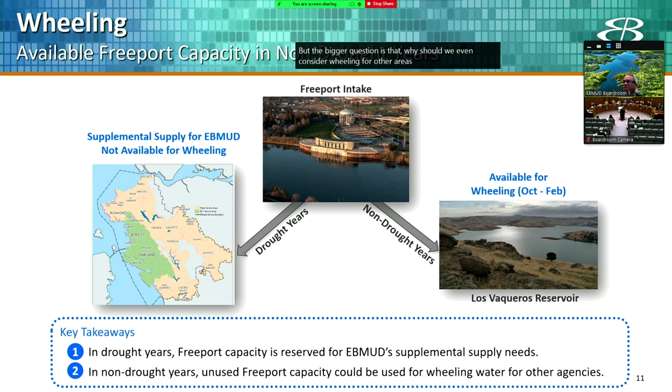But the bigger question is, why should we even consider wheeling for other agencies? That's because by law we are kind of obligated. Water Code Section 1810 through 1814 requires an agency to wheel transfer water for other bona fide users if conveyance capacity is available, provided that certain conditions are met.

These conditions are: the wheeling agency receives fair compensation, and the wheeling operation does not injure any legal users of the water or adversely impact fish, wildlife, in-stream benefits, or the economy. If these conditions are met, we are obligated to wheel.

Plus, wheeling supports regional partnerships and may improve regional reliability and resiliency. And also, if fair compensation is received, wheeling can recover some of the capital costs that have already been spent to construct a facility that is not being fully utilized.

For example, when we looked at the LVE partners using Freeport during non-drought years between the months of October and February, we found out that we could collect revenue up to $140 million by letting other partners use Freeport.

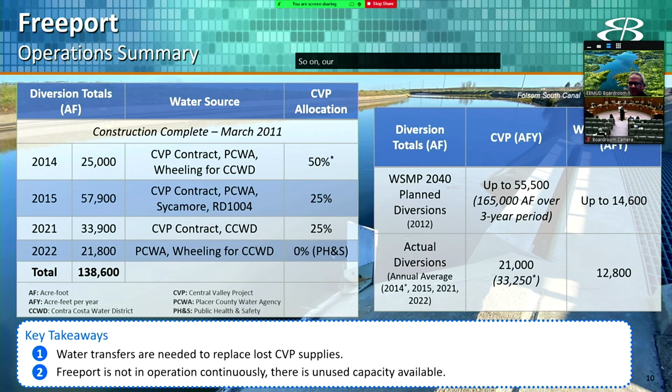Thank you. I have some comments I'll add. So on our wheeling principles, I think we will need to not just take a simplistic look at the water use efficiency criteria that we enumerated in the Marin example. I think we got to the bare minimum, and I was minimally satisfied in an emergency situation. But if this were going to be under regular consideration, I would want to look at those more closely and improve them so that our infrastructure is not being abused to support an unsustainable water future. I think we need to be looking at the water use efficiency in all types of sectors and make sure that our infrastructure is used to support something that is efficient and sustainable. And so having those criteria reviewed and improved for this quite different application, I think would be pretty important.

And then second, I think the board would need to better understand the assumptions for the EIR. You know how we were assuming not more frequent. Well, we should find out what kind of draw was studied in the EIR, and consider if there are changed conditions along the Sacramento River and affecting the delta, and just to understand, before we do anything major, what are the impacts on the river and the fish and other ecological criteria, so that we are aware of what was studied, aware of what changed conditions could indicate, and that we not take the environment for granted, based on our EIR that may be nearing 20 years old.

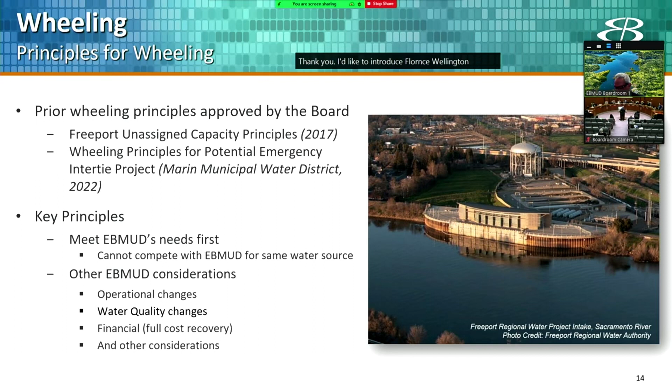We can move on to recycled water. I'd like to introduce Florence Wellington for covering our recycled water. Thank you, Hassan.

I just want to give a quick overview of our current recycled water project. We currently have 5 non-potable projects, and combined those 5 projects have a production capacity of 9 million gallons per day.

Our goal is to produce 20 million gallons per day by 2040. We do have future projects lined up that could provide an additional 11 million gallons per day. So far, to get the 9 million gallons per day, we have invested $145 million plus state, federal, and private funding.

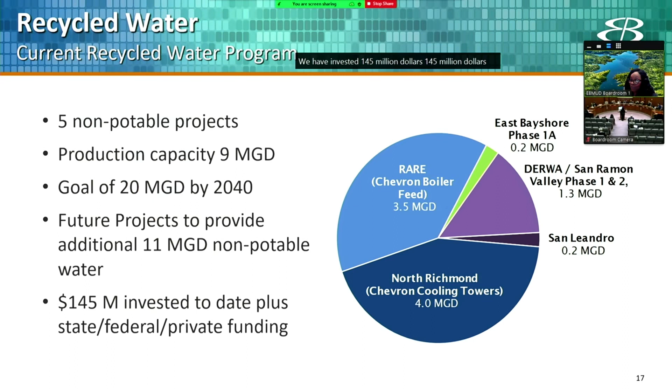In 2019, we updated our recycled water master plan. The plan recommended that we expand 3 of our existing projects, the ones at the top of the figure: East Bayshore, San Ramon Valley, and our 2 projects for Chevron, North Richmond, and RARE.

The plan also recommended that we support new projects like Phillips 66 and satellite projects. The plan also looked into the possibility of potable reuse projects, and that will be reevaluated in our upcoming 2024 strategic plan.

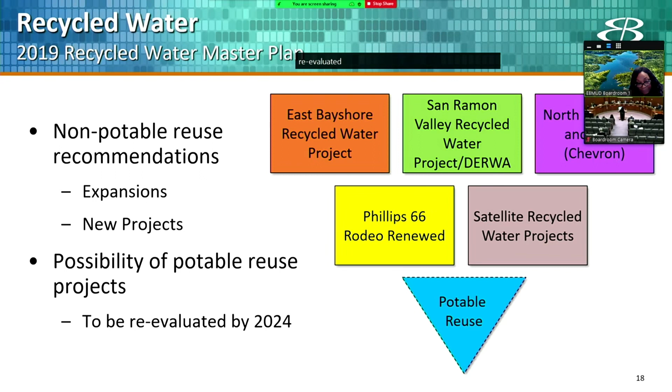Since our last update, there have been some changes in regulations and legislation. In August of 2022, the governor presented the California Water Supply Strategy, which included several statewide goals, including recycling 715 million gallons per day by 2030 and 1,600 million gallons per day by 2040.

The Water Board is also scheduled to approve regulations on potable reuse by December of this year. They have been reviewed and commented on by expert panels and water recycling advocacy groups, and we have been tracking those regulations all along.

The governor also approved legislation that lowers the indoor water use standards. Lowering these water use standards, although really good for potable water conservation, provides less recycled water supply and has impacts on the recycled water quality.

The state also updated the Cross Connection Prevention Handbook, which is important because it codified backflow protections to the potable water system. There have also been new regulations regarding PFAS and CECs, which is important because these regulations could affect treatment for recycled water, especially when we're looking into potable reuse options.

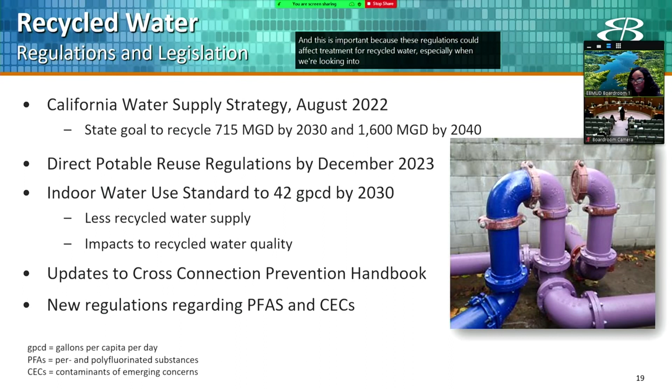Source and water quality are some things we've been looking into as well. Reductions in wastewater flow due to conservation and drought have a negative impact on recycled water.

When wastewater flow is reduced due to conservation or drought, it promotes increased Bay water intrusion, leading to higher TDS concentrations. The lack of dilution also causes higher ammonia concentrations in the wastewater. So with TDS and ammonia concentrations being worsened during droughts, that's exactly when recycled water is needed the most.

Recycled water with high TDS and ammonia can't be used for industrial applications such as cooling towers, and it also has a negative impact on landscape irrigation. The photo to the right shows what a healthy plant looks like, and the impacts of recycled water during droughts on those same types of plants.

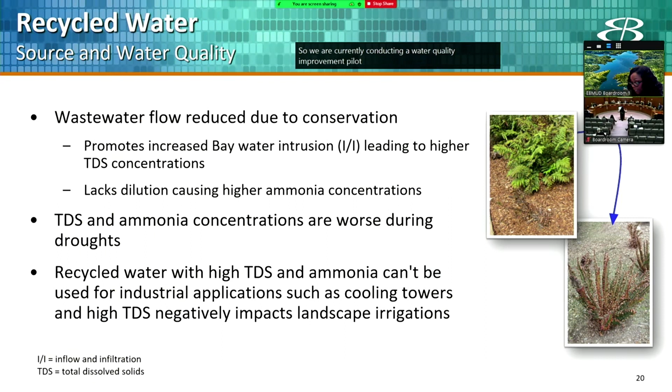We are currently conducting a water quality improvement pilot study, which will be completed in March of this year. The study is going to recommend the best options for improving water quality.

Once we implement the recommendations from the plan, we'll be able to increase our customer base and the types of users we have. We'll be able to potentially increase our supply at RARE, and we'll be able to provide washdown water for Caltrans maintenance fleets.

The president recently signed an omnibus bill that earmarked $4.2 million to extend the distribution pipeline for East Bayshore from Emeryville to Albany. Once installed, this pipeline will increase recycled water usage for this project by 370,000 gallons per day.

The $4.2 million we got was part of a WRDA authorization the district received for $25 million, so the $4.2 million will be taken from that, but we are seeking additional funding. We're currently working with the Corps to see if we can get another authorization that will allow us to expand our pipe distribution into Alameda.

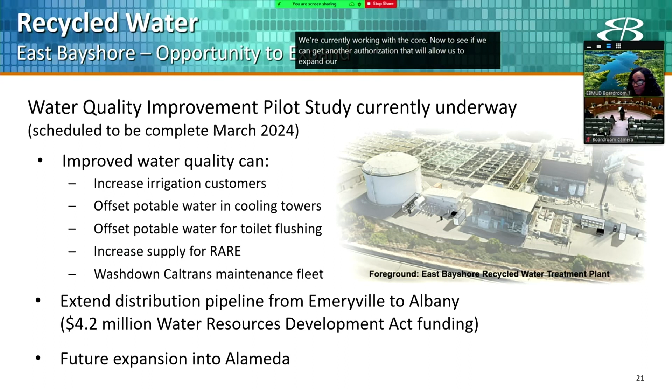Our DERWA project is our joint partnership with DSRSD that serves the San Ramon Valley area. This has been a very successful project for us, although it is supply short during peak months, and the agencies have been working to look into supplemental supply and operational strategies that can maximize our deliveries.

One thing we did two years ago was DERWA entered into an agreement with Central San to divert some of their wastewater to DSRSD for treatment. We operated that project for the first time in 2021. We didn't have to operate it in 2022, so we're coming up on the third year of the agreement, where we'll see whether or not we need to operate it this year. The agreement is for 3 years, with the option to renew for up to 5 years total.

Another thing we did for this project was install flow monitoring devices on our largest recycled water users in the San Ramon area. With those devices, we're able to get real-time data, so we've been able to alert customers when they have leaks or if they're using water off hours. This is a way for us to conserve our limited supply of recycled water.

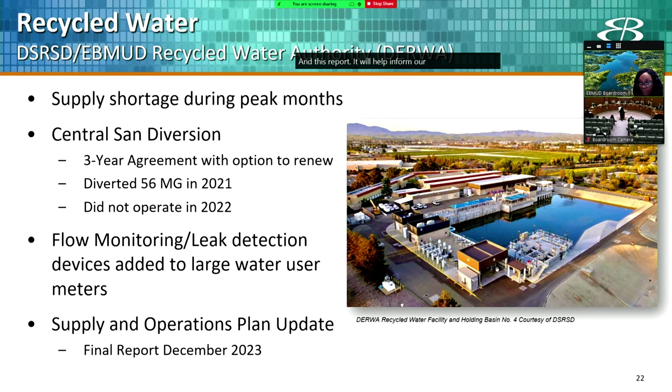Last October, we signed an MOU with Central San to complete a feasibility study evaluating 6 recycled water partnership opportunities. In December, we finalized the work plan to include evaluating both non-potable and potable project alternatives. We're currently procuring a consultant to help with the evaluation.

The scope includes analyzing information from previous studies, defining feasibility criteria, evaluating each of the project concepts, and developing cost estimates. Equity will definitely be a consideration when evaluating each of the project alternatives. We expect to have that report completed by October of this year, and it will also feed into our strategic plan update.

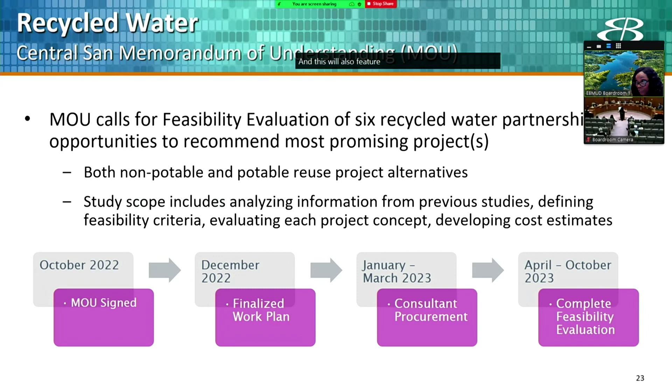This is an overview of the 6 projects we will be evaluating, considering cost, feasibility, and equity. Although these are all great projects, there's not enough recycled water supply for us to implement all of them, so the final report will recommend a short list of projects to be considered in the recycled water strategic plan update.

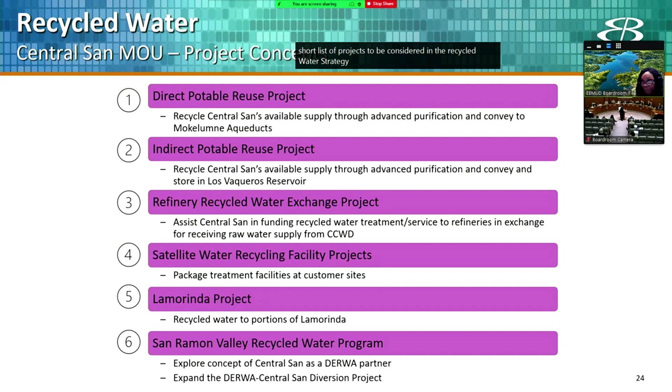Just last week we were able to issue an RFP to start on the strategic plan update. Proposals will be due March 17th, and we hope to bring a consultant contract to the board for consideration in April for that report.

The final report is going to incorporate the Central San feasibility evaluation. It will also incorporate the results of the East Bayshore pilot study project we're working on to improve water quality, and it will incorporate information from the DERWA supply and operations report. It will reevaluate recommended non-potable projects from the 2019 report, reevaluate potable reuse alternatives, and consider new recycled water goals to incorporate potable reuse.

We hope to brief the board on the progress of that report sometime in early 2024 so we can get some feedback from you all.

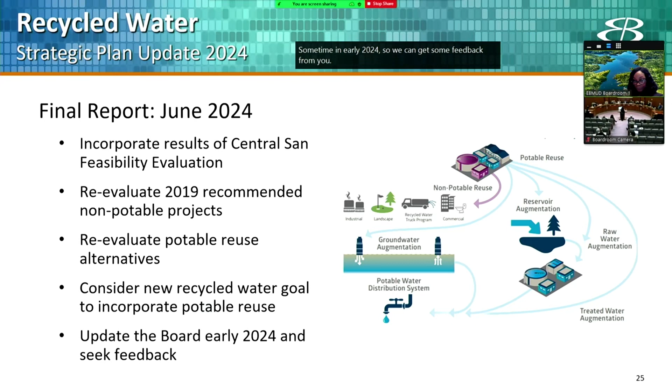We're also going to be looking at some other alternatives, such as expanding from Albany to Richmond, expanding over to UC Berkeley, and also looking at potable reuse.

So we have the ability to possibly increase our goal from the 20 million gallons per day. But one of the things we will be looking at is how we can bring the costs down, so with cost sharing, maybe with other agencies or entities, funding through state or federal sources, and things like that. And then we'll update the board at a future meeting on the strategic plan. So that's all I have for recycled water.

So if you have any questions, I'd be happy to answer them. Director Coleman? Thank you, big proponent of recycled water. My concern, and you mentioned it, is PFAS.

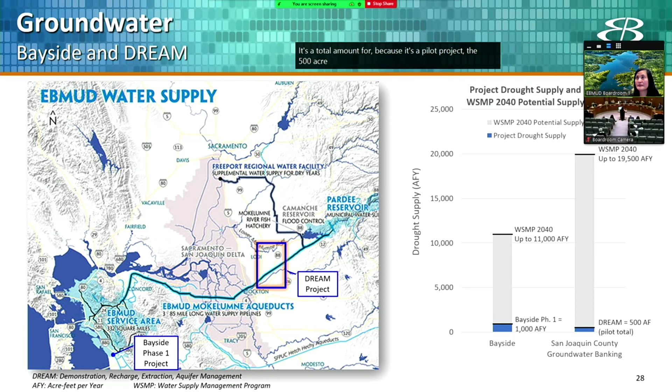I want to highlight the update on Dream first. We have an exciting update to provide. We achieved a milestone just a week ago of completing the startup extraction testing of the new facilities constructed last year to deliver groundwater into our aqueducts. Over about 2 weeks, we injected about 40 acre feet of groundwater into Mokelumne Aqueduct 1, which was blended with surface water. That's a big milestone, since we've been trying to bring groundwater from San Joaquin County over to the East Bay for about 30 years.

We still need to finish the pilot, evaluate the results and lessons learned. We have released about one-third of the Mokelumne River water being provided to North San Joaquin for this project—about 342 acre feet to be exact. We still have to release two-thirds of that, since 1,000 acre feet is the total for this project. When surplus water is available, we'll be able to make those releases. I'll talk more about that in the next slide.

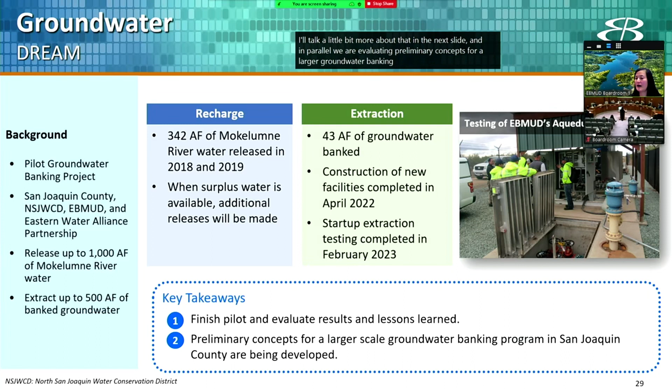In parallel, we are evaluating preliminary concepts for a larger groundwater banking program in San Joaquin County. We are in discussions with the partners on that.

As far as the surplus water, whether it's available this year, we still have to wait a little longer. We are currently evaluating whether we have surplus water available relative to state regulations. At the second board meeting in April, you'll be presented with the water supply availability deficiency report and provided the water supply conditions assessment for the water year.

Typically at that meeting, like back in 2019, there was a preliminary determination of whether surplus water was available, but staff makes a final determination after that report comes out as to whether or not it's available as surplus to our needs and obligations. If it's confirmed that we have surplus water available, we can proceed with scheduling storage of the surplus water, and the timing of that depends on project specific requirements and conditions. For instance, with Dream, we have to work with our partners to ensure the timing coincides with when they need it for irrigation.

So that's the update. The question is whether we'll know this year in time to take advantage of the surplus water at all. I think there will be a determination in time, but it will still occur after the April water supply deficiency report.

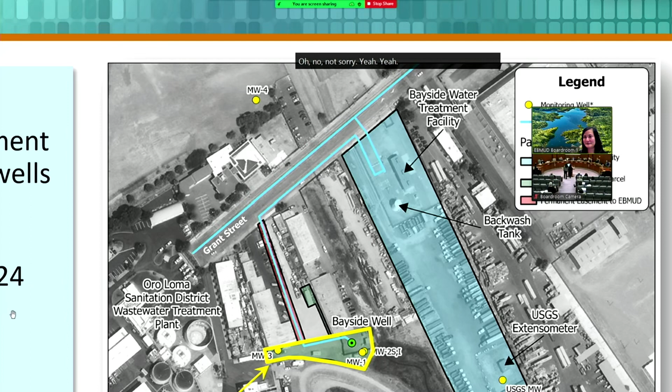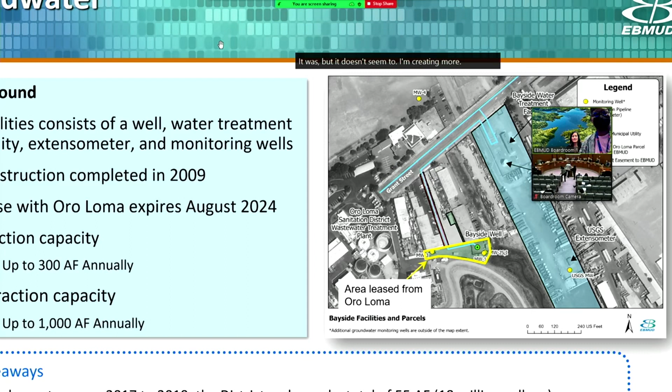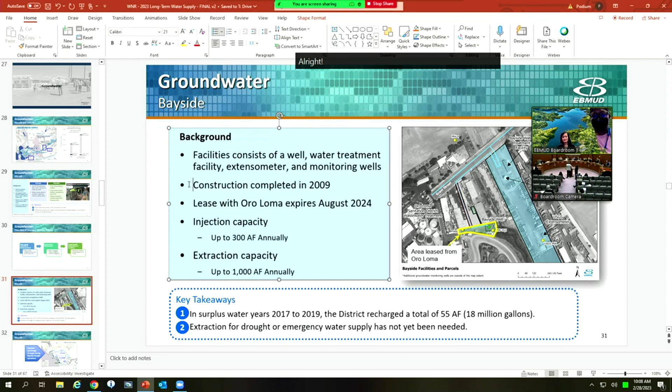Janetta, is there a way to move where the spotlight is on the Zoom so we can see the key? I can't read the key on my paper. Yes, thank you—up, over, put it over our logo. Oh, no, not that. Sorry, undo the Zoom. It's not the display, it's what's behind it, the picture. Move it up over our logo if you can. Not, no, don't. It was, but it doesn't seem to. Sorry, I'm creating more confusion. Sorry, Robert. Can't you go to slideshow? Control L.

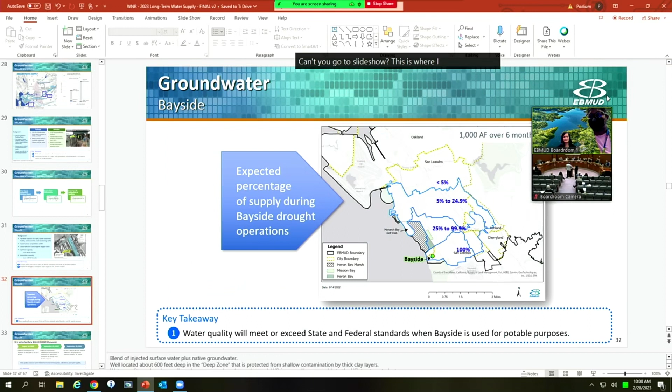Yeah, I think I was just finishing. Is that better? Thank you.

Just the last point on this slide - we have not needed to extract using Bayside for droughts or emergencies yet.

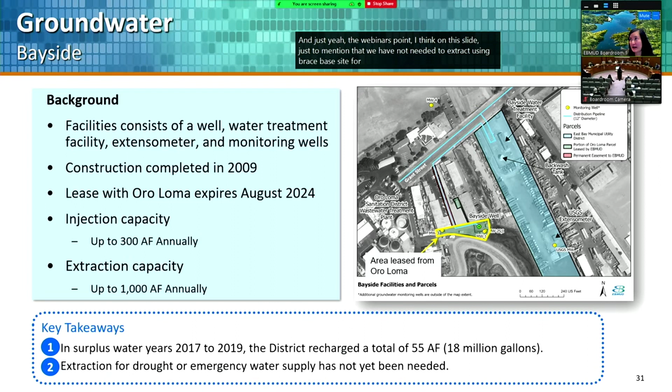Ahead of our discussions with Oro Loma, we conducted updated hydraulic modeling to look at the area over which the Bayside water is distributed and the percentage of the supply when it's in operation. This figure shows that the area over which Bayside water gets distributed extends roughly from 2 to 4 miles away from the well, and the percentage of supply received within that area ranges between 5 to 100%.

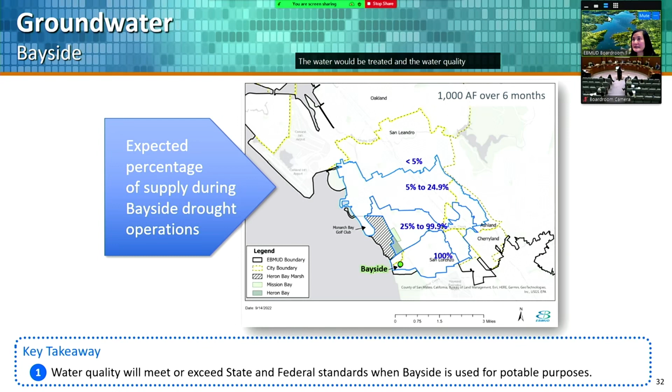Just a reminder that the Bayside well is located in the deep aquifer zone, about 600 feet deep. It's protected by thick clay layers from shallow groundwater impacts. If Bayside were to be used for potable purposes, the water would be treated and the water quality would meet or exceed all state and federal standards.

This is the summary of the discussions we had with Oro Loma last year. In August, we presented the board an update on Bayside, and as a result of that discussion, the board requested a workshop to be held because they had more questions on the project that they wanted discussed in more detail.

We went back in mid-September to present on the questions we received from the board via email, and following that, a week later, the board met to consider the lease extension, but they did not vote to extend the lease beyond the August 2024 date.

The public was present during these meetings. Some of the key concerns that were raised were related to environmental justice, subsidence, and water quality.

So next steps: East Bay Mud will plan for a replacement Bayside well to be constructed on nearby East Bay Mud property, where our existing water treatment facility for Bayside is located. We will also need to address concerns raised by Oro Loma and the local community groups through community engagement.

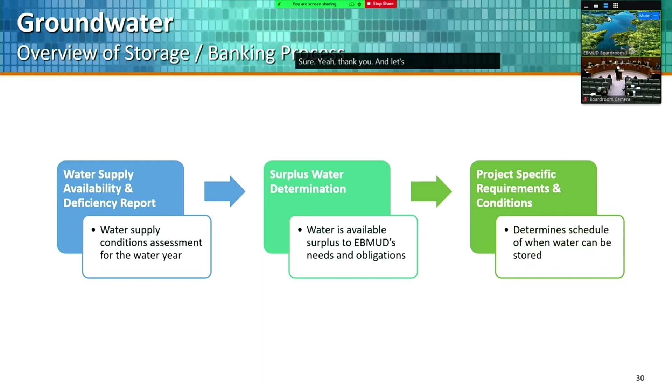If there's no further questions about groundwater, let's go on to Los Vaqueros. I'll also be providing the update on this project. Just a quick reminder: it's to expand the existing Contra Costa Water District's reservoir by 115,000 acre feet. East Bay MUD is evaluating whether to secure 30,000 acre feet of storage, and is one of the 8 voting members of the JPA that was formed in 2021. The project capital costs are currently estimated at $980 million, with a California Water Commission grant of $477 million. The current estimated cost for East Bay MUD's capital cost is between $65 to $130 million.

And just a reminder on the benefits to East Bay MUD for this project. It addresses 2 of our goals in our strategic plan to ensure high quality water for the future. That 30,000 acre feet that's also located west of the Delta would help to improve our reliability during droughts and emergencies, provides resilience to climate change, and integrates with regional partnerships.

Los Vaqueros is one of the drought contingency plan projects that the Bay Area Regional Reliability Partners had identified. And in addition, this project also helps to meet our goal to surpass environmental standards and protect public trust values

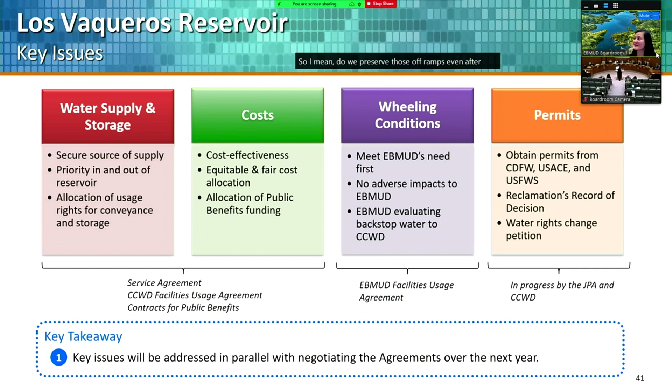That's what we're proposing, yes. If they are maintaining this schedule to complete the agreements, we do need to preserve those off-ramps for issues we have not resolved after the fall of this year. Correct, that's what we propose. Okay, because this is their proposed schedule.

Yes, we don't have our schedule up here. No, but as I said, our schedule does not sync with what they're proposing currently. So what happens—that's why we have this. We do need to keep these off-ramps in place if we're going to continue with these agreements. I guess that's my question: do we have those off-ramps even though we're at odds with the JPA on these issues right now? So how does that get resolved? Do we just walk?

I'm trying to understand how it works. Yeah, so we actually had a meeting yesterday just with the general managers to talk about this, and we weren't the only ones that expressed concerns about the lack of details we're seeing from the service agreement and their accelerated timeline. So what I think Grace is also sharing is that we have proposed that if you're going to stick to that timeline, as far as when you need Water Commission approval,

that we have these off-ramps in place to say that if after our studies are done—on whether we can get a water supply, on our costs—it doesn't meet our needs, then we have those off-ramps to walk away from the project. I don't think we're the only ones with this issue, but they have this deadline right now and we're telling them we can't complete all our studies in time. So we don't want to get to a point where we sign on without the off-ramps, and then there's no way to back out.

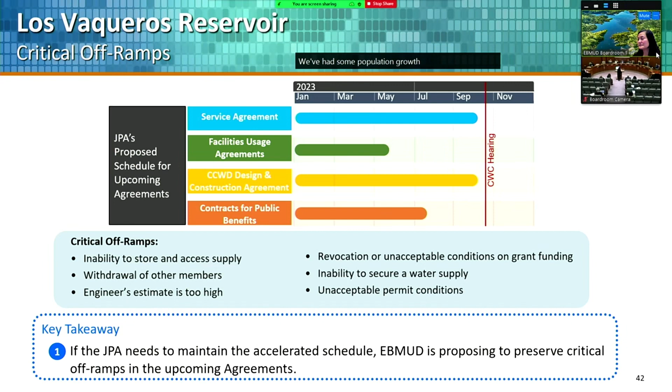Roughly 150,160,000 acre feet. That's in the past been timed to be about 6 months worth. We've had some population growth, but we've also had a lot of structural conservation. So is it actually stretching to more than 6 months? No, it's structured to be 6 months, but with the understanding that there's going to be some significant cutbacks from our customers to achieve that 6 months. So it's not 6 months at the regular level of demand. If we have to get to that 6 month supply, the customers will be cutting their usage back.

If we lost our aqueducts. Got it. So that was 6 months with an emergency rationing. Yeah, and as part of,

This is why I think the only reason that I really support this project is if we lose our aqueducts in an earthquake, or there's some 12-year drought or something like that. And in both of those cases,

Everybody wants that, whatever, 275, everybody wants their piece of that 275,000 acre feet in LV, right? Is part of what we want to seek assurance for is that we get that 30,000 acre feet when we need it, under any circumstances? Well, yeah, under the drought and emergencies, that we would be utilizing it for, yeah.

If you add up all of those molecules of water that presumably would be in this expanded LV, do we know when will we, I mean, we're saying up to 30,000 acre feet. When will we know what the other partners, I guess my question is, will there be enough water to go around at the end of the day? Or is that something that we'll know?

Good morning, President Katz, members of the board. This portion of the workshop is focused on advanced metering infrastructure. In December, the Planning Committee received a presentation on the findings from a project estimating the costs and benefits of AMI for all customers, as well as payback periods. This presentation will show the highlights from that Planning Committee presentation, include a question that was asked during it, and finally give a preview of the next steps of AMI at the district.

Last year the district worked with a consultant, Black & Veatch, to estimate the costs and benefits of AMI for all customers. They took our existing AMI system, the data from that system, as well as their own experience from other AMI projects, and estimated that AMI for all our customers would have a present worth of 165 to 190 million. They also estimated payback periods for systems like that at East Bay MUD, estimating 14 to 17 year payback periods — considered long payback periods. The takeaway was that any decision to expand AMI at East Bay MUD would have to be motivated by factors other than financial payback.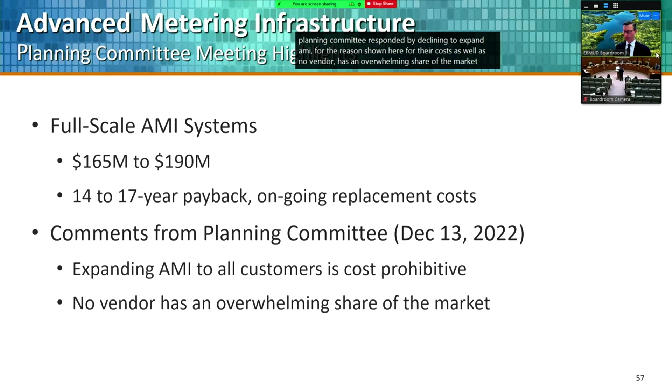By the time it pays itself back, you're spending money to replace it. You get a year free, and then it's... right, or a year or two. This particular example pays for itself in year 14. So it does have a few years of payback, but then you're in the process of replacing it in years 18, 19, 20.

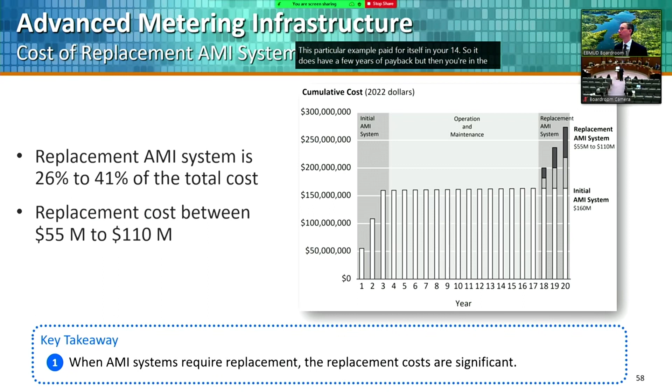So with that, the district has some plans for its AMI system. We have an existing AMI system that is substantial, and it may be statistically significant to represent all of our single-family customers as a class, so that we can answer questions about the impact of conservation outreach, pricing signals with our customers, and also determine if AMI helps us understand peak water use by our customers.

And so the district's going to be partnering with statisticians and behavioral economists at UC Berkeley to help us answer some of these questions.

We can also get data from third-party devices that customers install on their own meters. One example is Flume. That could be an expanded rebate, although the district would prefer to have the customers have some ownership over it. The vendors for other third-party devices are willing to share anonymized data with the district, so that we can have another data set to understand the impact of conservation messaging and peak water use in our service area, without spending as much money as a full AMI system.

That's the final slide for the AMI portion. I'm happy to answer any questions.

Director Coleman: Thank you. Of the 20,000 meters that we have approximately, the data we're getting back, how effective has it been in terms of saving water, letting customers know that they have a leak and getting the leak fixed? The return on value, I guess I'm looking at.